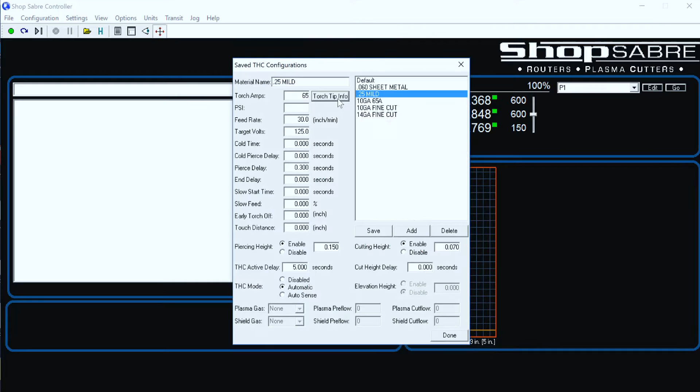Now there's another issue that people that are new to plasma seem to worry about, and that is how you configure it, because each different material has some different settings that you use. Well, we simplified that. First off, we have a system where you can actually pre-configure the materials that you're going to use most of the time. So all the machine operator has to do is select off of a drop-down list for the material. There's nothing else to be done.

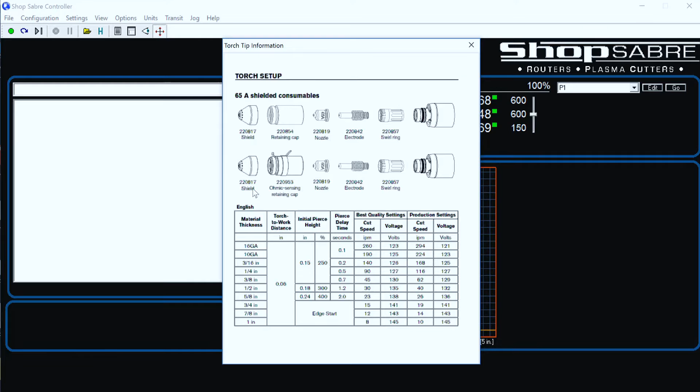Now also, plasmas use consumables, and here's how we handle that. We actually put that information on the machine control itself. So instead of having to get a book out and find the part numbers, they're right there for you. And that sheet also has all the different settings for different materials should you need to configure something different.

Now, finally, let's look at something that's really, really important in plasma, and it's called torch height control. Now, here's why it's important. What happens is the torch on a plasma is not perfectly parallel. It's kind of conical. So the width of the cut changes based on height. So if your height changes, your accuracy changes. So we created a system to control that's based on voltage, and it runs automatically. So that's going to give you much better cuts, and it's going to give you really, really good accuracy.

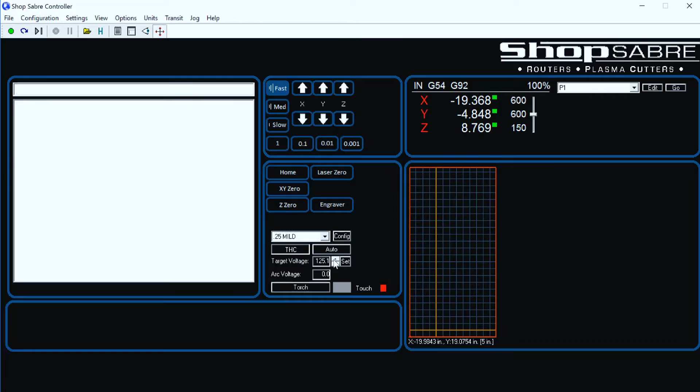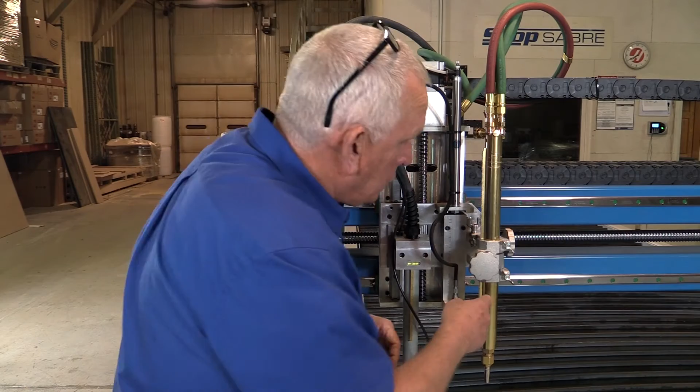Now, there's one final part of plasma we haven't talked about yet, and that's the heads themselves, and let's take a look at that. This machine actually features a couple optional heads. The first one is an oxy-fuel head, and that allows you to actually cut thicker material. And then this is actually a vibrating plate engraver.

Now it's really neat. Here's what you do with it. Let's say, for instance, that I've cut these parts out and I'd like to attach a part number to each one. That will actually engrave the part number into those pieces. But there's another neat feature that provides, and that is, let's say you've got an irregular shaped part and there's going to be some holes drilled in it later down the process. You can actually mark the locations of those holes with the machine.

So downstream, the operator doesn't have to do that. They're already located. So that's a really neat feature. Now, the torch itself is a Hypertherm torch with a breakaway. Now, we're just about ready to actually make something on this machine. We're not going to need this head, so we'll take it off. We'll put a piece of material on the table. Let's go into the office and see how we create this neat product.

You know, CNC gives us the ability to make parts that have a lot of curves in them. Sometimes we do that with a CNC router, and we might cut wood, plastic, non-ferrous, stuff like that. But if you take plasma, you can actually take steel plate and cut irregular shapes out of it.

Now, a lot of times when we do one of these video demonstrations, we make a machine part or some kind of bracket. But I wanted to actually get into something a little different on this video, and that is decorative stuff. There's actually a whole class of products that you can make with a plasma that are really standalone products. And that's what we're going to do on this video. Now let me show you how we arrived at this.

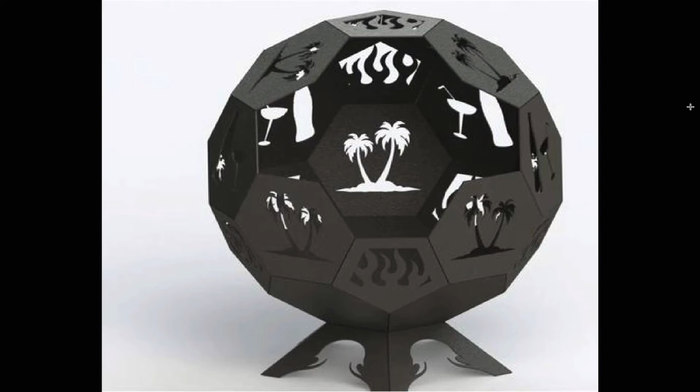Okay, we started the process by going out to the internet and looking for some plans. And we went to DIYWELDINGPLANS.com and we found this neat product. What you see in this photo is actually a finished assembled product, and it's a fire pit, and it's made out of 14 gauge mild steel, and you cut it out as a flat pattern, and then it folds together to create the shape, and you tack weld it together.

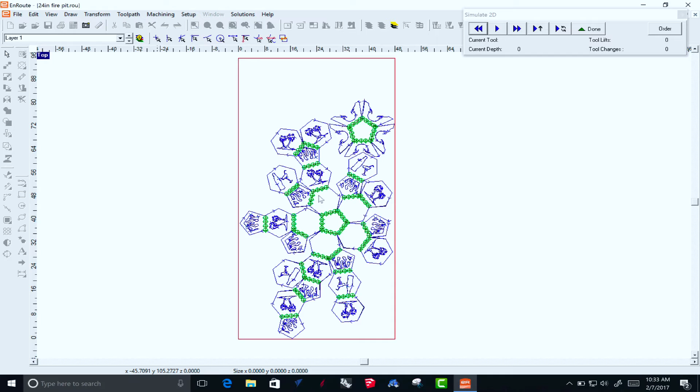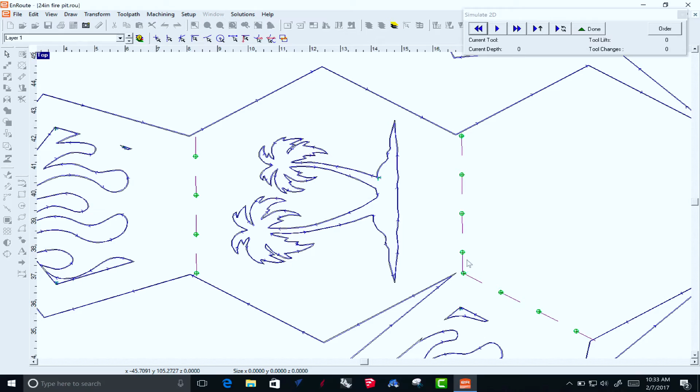Now let's take a look at the actual layout that's folded out. There's really two parts there. One of these assemblies actually folds into the base and the other folds into the rest of the fire pit. Let's take a little bit closer look at the geometry. What's really neat about plasma is I can have so much detail. So I can cut these palm trees out. Think about if you had to do that some other way. Also what they've done here is there's some slots placed on these folds to make it easier to bend. So when you fold it together, it makes it much easier for assembly.

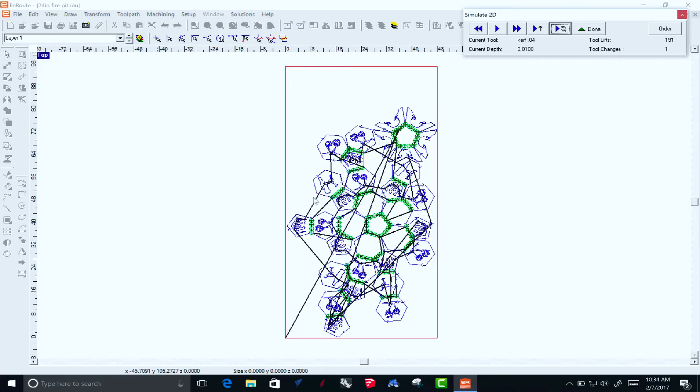All right, now let's just take a look at what a simulation actually looks like. Here's what's going to happen first. The machine's going to move over to the first position, and we're going to go around and cut all of those little pierced areas next. And then once those are cut, we cut the remaining straight line parts, and that gets us to there. And that's all there really is to it. So once we get the material out to the machine, all we really have to do is lay it on the machine, load the program, and run it. And we should get a fire pit. Let's go out to the machine.